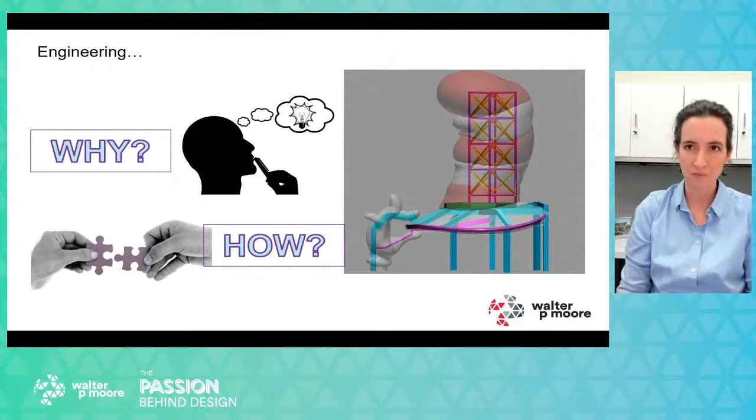So I've run the gamut of structural engineering for hospitals, office buildings, commercial, parks and recreation, and education, K through 12. But what I really have a passion for is collegiate sports work. I've worked on multiple different types of collegiate sports: basketball, football, outdoor track, indoor swim and dive. Every time I get to do something I haven't done before, it's very interesting.

The whole end goal is really to design a space that people are going to use and function in. So in order to do that, you have to understand what they want to do in the space. The architects sit down with all the end users, the coaches, and the facilities to really see what the space needs. Then they come up with the design, and we have to engineer around it and understand how it all fits together. It's very interesting and exciting to be able to work on these projects.

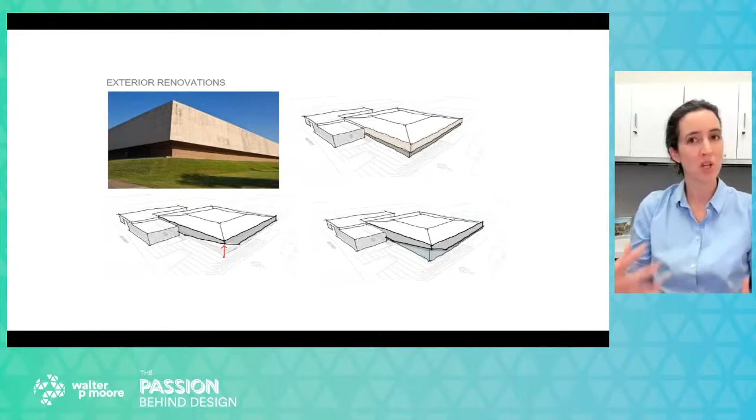So the first thing that we did in order to make the outside look like this: the original exterior was kind of bland. It was made during a time in architectural history where there really weren't that many windows, and these big solid panels were critical and important. And so it kind of ended up looking maybe like a big mushroom. And so I'm thinking in my head, how do you lift up a building? It's kind of heavy, but hey, I'm game. Let's engineer this. Let's figure it out.

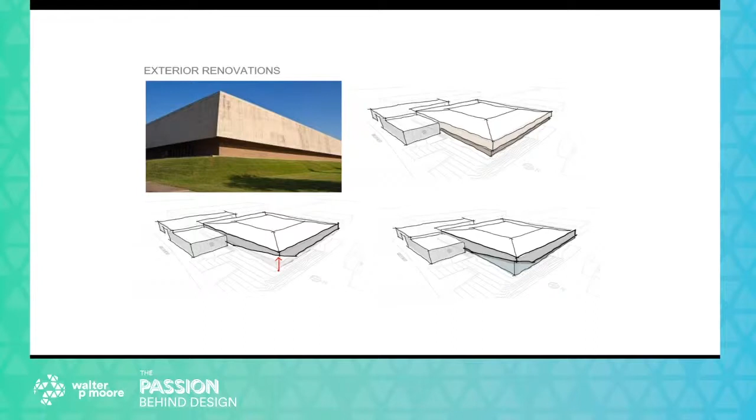So in reality, what these panels are, they're 17 feet deep trusses. So trusses are steel members that kind of work with a load path, a bunch of triangles. Very important part of engineering and structural engineering. But they're 60 feet long. And so luckily they're only supporting these exterior panels. They weren't supporting any part of the building.

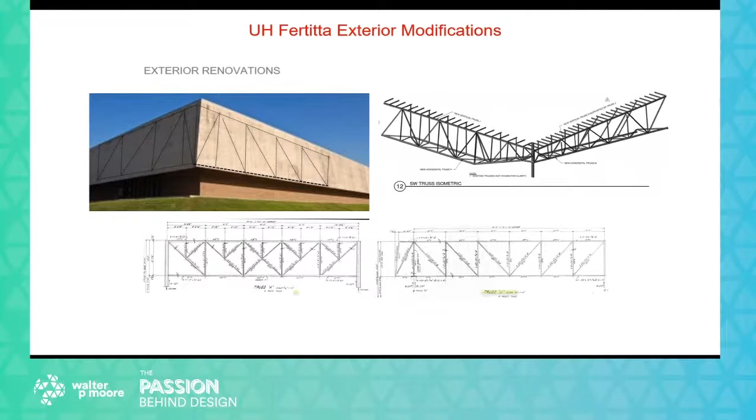So basically what we had to do is remove 2 of the panels and then create new trusses with the profile of the new exterior skin, and then replace the back with glazing to let light in. So this is how we kind of engineered the solution. So this structurally is how you lift up the building. So that was pretty exciting. And that wasn't all. This was just the tip of the iceberg.

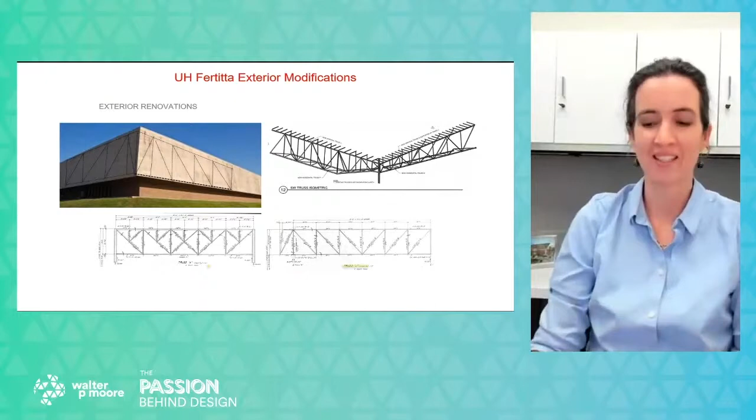So this is what it looked like. What we also did was a complete renovation of the interior. So this was a $60 million renovation, caused by a $20 million donation by Tilman Fertitta. And so Turner was the contractor on this project. They did an amazing job. The whole team, this was just a great project to work on. The U of H facilities guys were great to work with, etc. It was just really a transformation.

So the original Hofheinz Pavilion was a big oval seating area. In sports terminology, we call the seating area the bowl because it kind of dips down like a bowl. The really primo seats in basketball are going to be the ones right against mid-court, and in an oval those are actually furthest away. So we had to renovate that. We had to create new seating. We actually built it up with metal studs over the existing concrete seating to get it closer in, to get more seats in there. And then they really didn't have that much premium seating. So what we did is we created a new club underneath it.

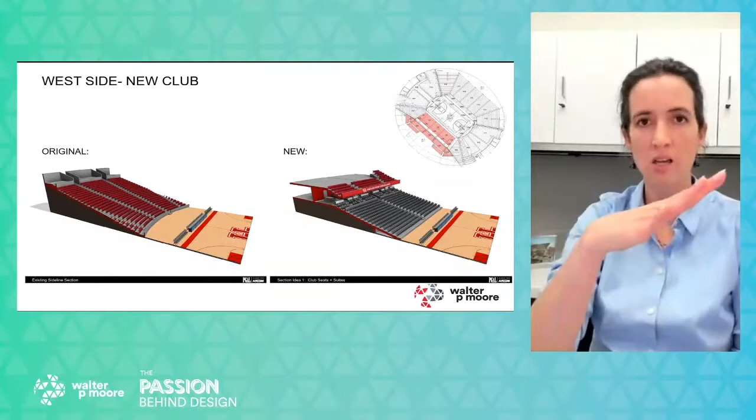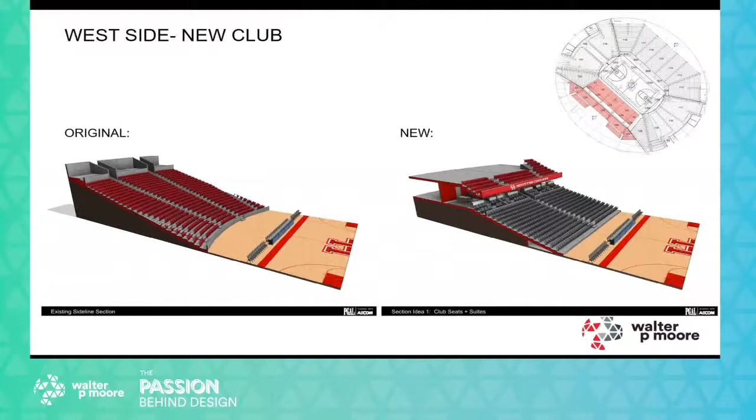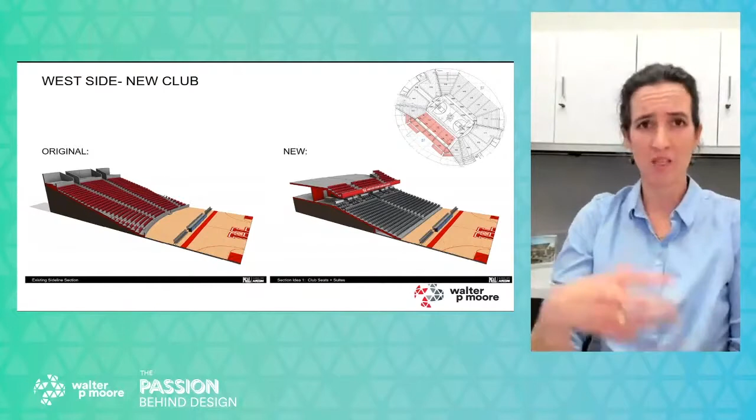So this was a rendering from the architect, AECOM and PGAL. This was the original seating on the left, where it was just a straight shot of typical seating, and then they have the premium in the background. And the new creation was actually building 2 tiers: seating and then a club area, and then an elevated space above that club area with a platform and new seating to get closer, but with an elevated view, because sometimes being right next to the court is not the best seat in the house. You can see the players, but you can't see how they interact on the court. So sometimes people enjoy being elevated. So now these became some of the best seats in the house.

So how we did that from a structural standpoint, like I said, they create the dream, we create the reality. The original seating was basically poured concrete, stepped concrete on grade, so on dirt. And so we dug out the dirt, we poured a new slab for the club area, we put a new foundation, a new steel column, a new steel structural system above there, and created those new seatings. And so out of the existing bowl, we created a new structural system within the existing building.

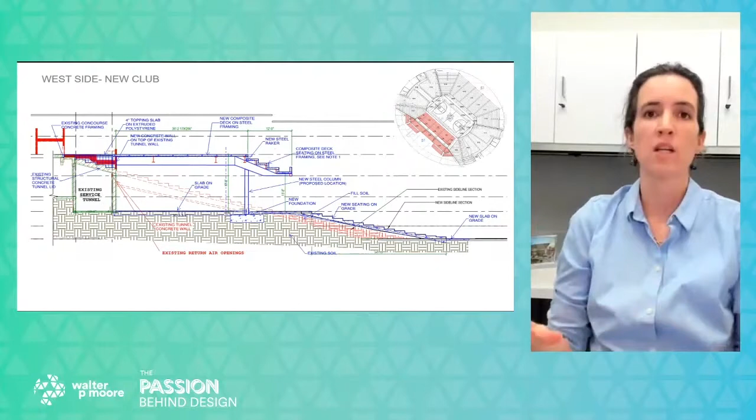So the roof was on, and everything had to be done in the tight spaces. And it really just transformed the whole arena. It looks completely different. It's the same building, the same skin, the same trusses, but it's almost like a brand new arena. So the other thing we had to do: sports lighting is important.

So make sure that you have enough lighting to light the players, with no shadows. Also, they hold events in here. They want to hold concerts and other major events, like PBR, professional bull riding. And so they want to be able to show and hang screens. So we created extra beams to hang from.

And then we created basically a catwalk walkway around up inside the roof trusses to be able to put all these lights and stuff in there. They have a really amazing light show now that's supported from these lights in the catwalk to really enhance this game day experience.

So the first question is, did you get to meet Tilman Fertitta? No, I did not meet him. I saw him. I got to be close to him, but I did not get to meet him. I did get to design the attachments for the statue of Roy Hofheinz, so there's a new Hofheinz statue there. I designed the attachment of the Fertitta name to the building, but unfortunately I did not actually get to meet the man.

The next question is, did you get to travel to see the project, and have you seen a game there? Well, I drove to the arena, which is about 9 minutes from our office. It was actually the night of our holiday party, a 1920s holiday party, so I was wearing my flapper dress. We left a little early and went to one of the opening night games. I was not the most well-dressed, but I was probably the only flapper in the audience. But it was amazing. You did get to see the excitement of the crowd.

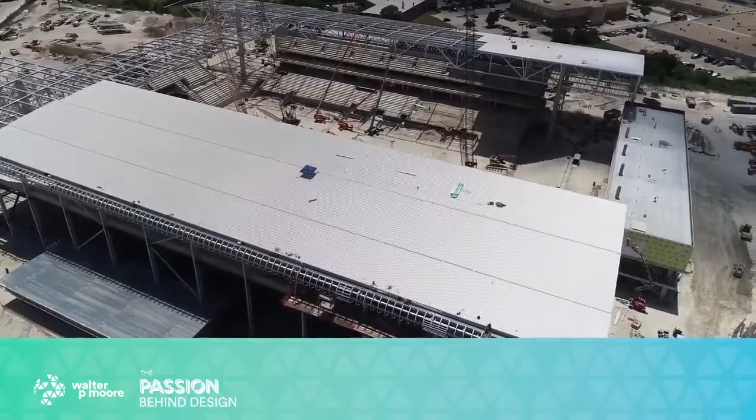And then one of my first projects was actually college basketball at the Yum Center in Louisville, Kentucky. And that was pretty exciting too. As big as we are in Texas for football, that's a college basketball town and region of the US. So I've done quite a few. My resume is fairly long.

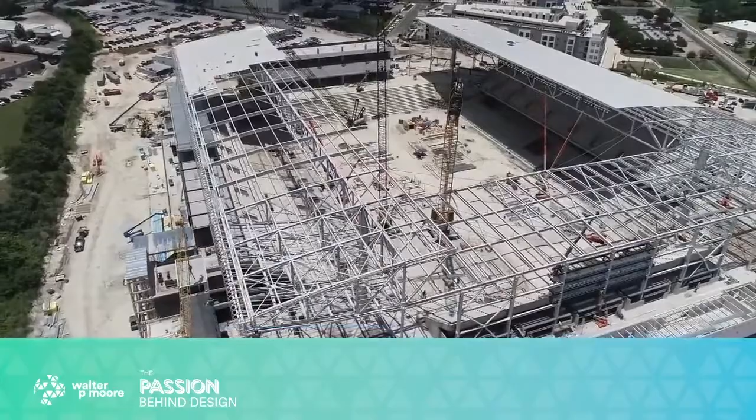The next question is, how does the floor accommodate a rodeo and basketball? It's a great question. I didn't mention rodeo, but rodeo is included. I designed an arena in Oklahoma before. And so rodeo is different. One, you have lighting, but you asked about the floor. The floor, like NRG Stadium for the Houston Texans.

So basically, the bottom is a concrete floor, and then you can put in the wood flooring with the balance for the basketball and the volleyball. Volleyball, I think NCAA just changed its standard, so there's a new actual flooring for volleyball. And when that happened, we got a call from one of the colleges saying they actually need more space to store the floors, so they can switch them out.

And so basically, when you have a rodeo, you pour a foot of dirt on the floor. And that's how you manage it. So when you're designing an arena for a rodeo, you have to deal with all the dirt issues. You have to make it durable so that they can power wash it a lot so that you can deal with the dirt.

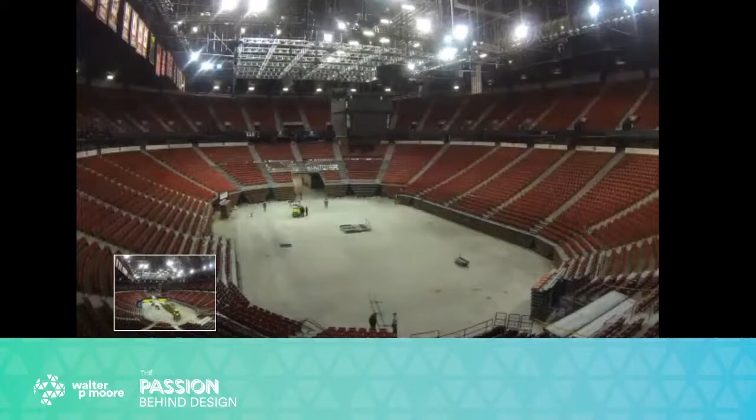Okay. Next question is, what's your favorite event to watch in the new arena? I like volleyball. I mean, I like basketball, but some of my coworkers played collegiate basketball, so basketball is really their thing. But like I said, growing up, one of my favorite sports was either watching women's soccer or volleyball. They don't play soccer in here, but volleyball would be my favorite sport to watch.

Okay. And then the last question for right now is, have you met any of the players at the stadiums you have designed? I get to be near them. So I design these things, but I am still on the outside. They're still the superstars, and there's the background team. So I'm working the background. So I see them, but I've never actually gone up and met them. More likely to meet the coaches and such. And the architects usually end up with more of the interaction with those.

But I got called out when I'm looking at a ballpark and the pro athletes are playing down there. And so I'm like, all right, which athlete has the blonde wife and the dog or something? You don't interact because they're doing their job, and their job is not to interact with me. I'm not a fan. I'm a worker. So I don't get to meet anybody, but I get to see them practice.

I've been in the U of H basketball practice. When they're practicing, I'm walking around, scanning, looking at the existing conditions, and I can hear them in the background. So it's kind of like a behind the scenes tour, but you still have to remain behind the scenes.

Okay. So that's all the questions we have for right now. So I think you can continue on to the next case study. All right, sounds good. Okay, let me go back over here.

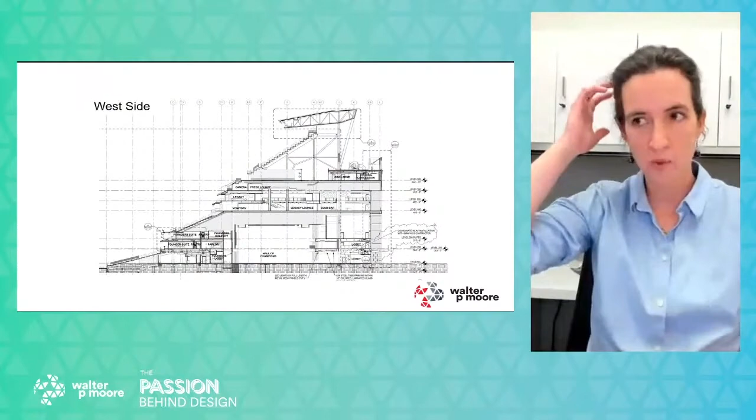The architect was Populous, the GC was a joint venture between Manhattan and Vaughan, and ME was the MEP engineer. So these are the sections of the building, from Populous's architectural drawings. If you cut the new alumni side down, this is what it would look like. You can see the tucked-in premium levels. There's the seating that we have to tuck in.

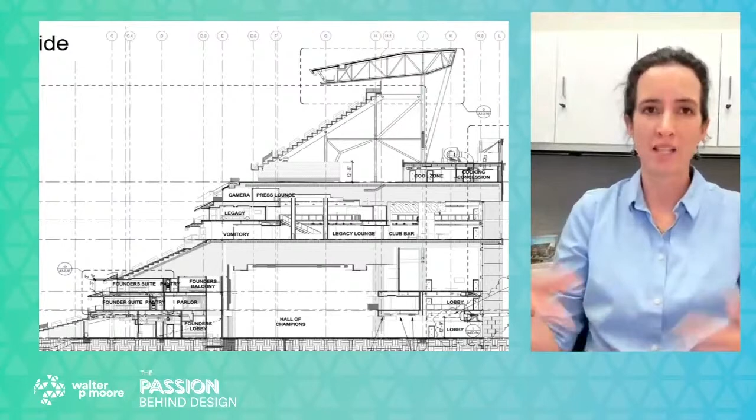There's a new canopy on the west side and the east side that was primarily to help shade the fans, but also to redirect their sound back down to the field to create that atmosphere of loud intensity when the opposing team was playing. And with all these premium seats, which is really where a lot of the money is made, everyone can just watch the game on their TV at the house. So you really have to create new ways and new experiences to get them into the seats. So this is what the architecture will look like.

There's a big open space called the Hall of Champions, a big event space that they rent out and show all of the historic sports figures from Texas A&M. We had to span over that, but we still had 5 levels of structure above it. So we had 15-foot-deep trusses going over 100 feet to support all that. So this is what I designed. The architect comes up with the levels, and then we design the structure. This is what we come up with.

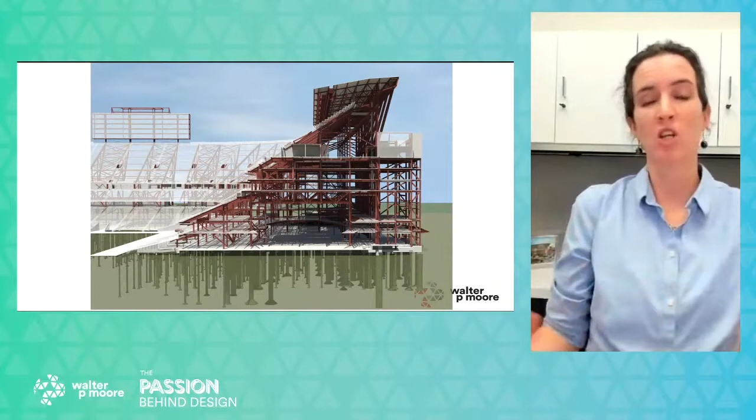So many aspects of this project I can talk about. I can talk about this project for days, but I'm going to talk just a little bit about the scoreboard. So the scoreboard is like 163 feet. It basically doubled the size. There may or may not be a lot of ego in collegiate sports, and A&M's primary rivals had a large scoreboard, and so this one had to be bigger. So there's a size requirement for how big this thing needed to be.

Scoreboards are made up of individual LED panels, and you can replace them. I don't know if you've ever seen one that went out, but you just get a black spot where it goes out. And so you actually have to design a series of walkways behind it every 10 feet so that you can interact and take the panels out if they're not working.

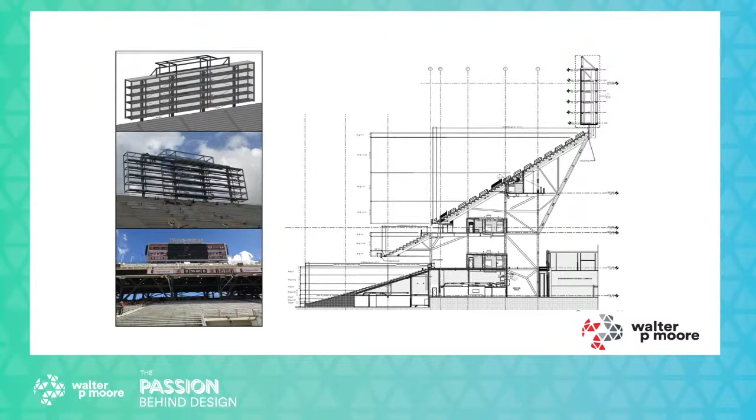So this is what the inside of the scoreboard looks like. There's 5 levels of catwalk, and then there's the roof, and then you have to create the structure to actually put the lettering on top of it. Now this scoreboard is 160 feet long and 40 to 50 feet deep. This is a 3D rendering from Revit of all the steel structure that we designed for it.

You can see the seating there. You see the openings in the seating. Those are called vomitories, where you can go back to the concourses and go to the restroom or get your concessions. And so this is a close-up of the scoreboard in reality.

It's very high up there. It definitely got my steps in. I actually had my daughter, my oldest, during this project, and so I will say walking up 9 months pregnant to get to the top of this, it's a workout.

And then this is the final product. So this is what it looks like. And this is everyone seeing the immensity of it. You can see there's the speakers on either side. Because this was built in phases, between phase 1 and phase 2 the whole sound system wasn't installed yet, so they had to hang temporary speakers. And so we had 2 telescoping tubes that stuck out to support the speakers.

I wasn't the engineer of record for the whole stadium, but I was actually the engineer of record for those little tubes that you see sticking out supporting the thing. So that was my design. That was me, all me. And then after phase 2 was built, they telescope in, and then this is a video of the fans enjoying it. You can see the excitement.

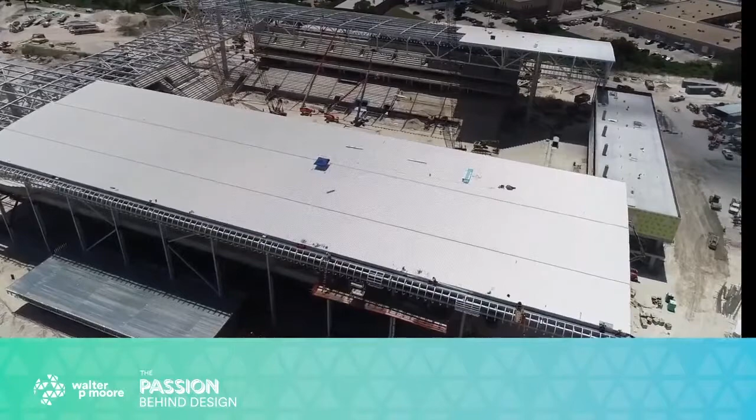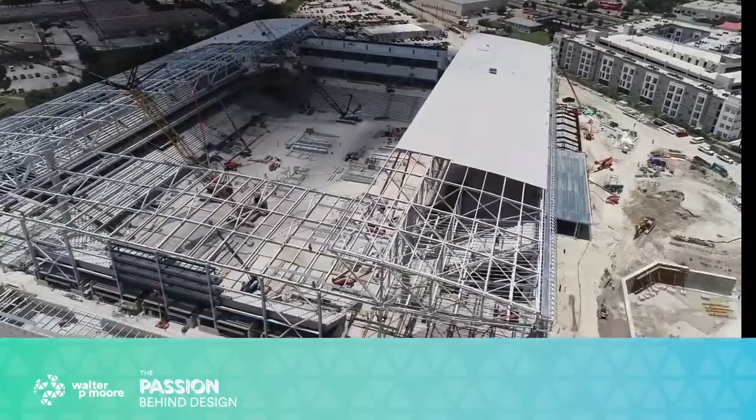So depending on how many crews, this was multi-crew, they made it in 9-month schedules. And they did some of the exterior work during the actual football season. That's super, super crazy fast. But in the normal range, if you're working a standard 8 to 10 hour day, 6 days a week, it can take anywhere between 2 to 4 years.

Okay. Do you prefer indoor or outdoor stadiums?

I like indoor. I like arenas, long span arenas. And there's also the hybrid. So Walter P. Moore actually specializes in the retractable roof, which can be both. So I like the long span roof and the catwalk systems. And that was actually one of the things I was designing this week on another project. It was just some of the catwalks and the multi-level and kind of talking about how they all perform. So I like indoor for the most part.

Okay. This is a good question. Does the cost vary when making stadiums? Yes, absolutely. There are chandeliers in Kyle Field, literally. So it really depends on your finishes. So there's the bare bones. So the Houston Dynamo, that's the soccer stadium. That's kind of like the golden standard for the low cost economic stadium. So what you have is painted block as the exterior, walkways, concourses. It's very basic. You find one feature to put your money in. And in the case of the Houston Dynamo Stadium, it's going to be the exterior skin. But the interior finishes are pretty bare bones.

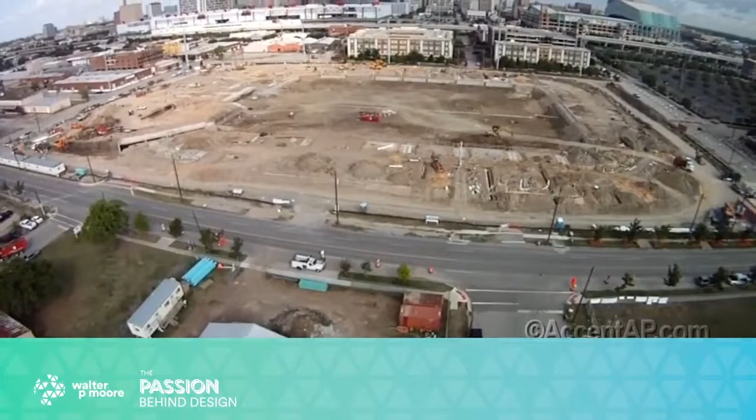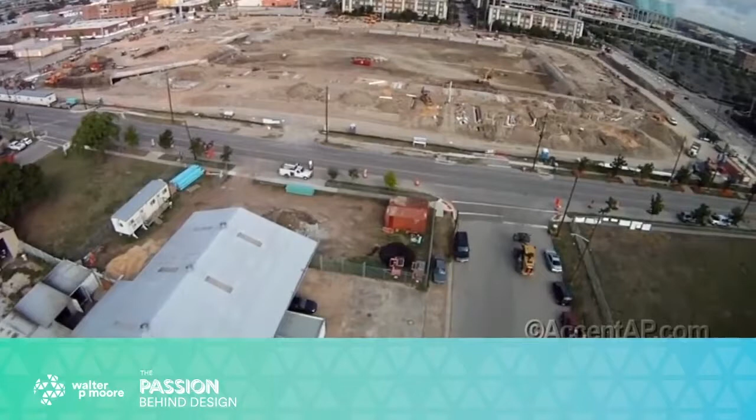Next question is, other than structural engineers, who else do you work with on stadium projects? Yeah, so we have the sports architects. Sports architects are specialty architects. They're usually firms that just work a lot on sports architecture, so they've done these things multiple times. There's a huge group of them in Kansas City. There's a group of them in Dallas and LA. So I work with sports architects, and I really enjoy that they're so knowledgeable about what they do. I really enjoy working on a really well-functioning, very competent team.

But then there's also specialty people, the mechanical engineers that design all the HVAC, so air conditioning and heating. Imagine heating all of this open space; it takes a specialty type of design. And there's the plumbers, and then the electrical engineers, who have to specialize because of all the sports lighting and the specialty electricity needs for these types of arenas. You end up working a lot with the same team over and over again, which is nice. They kind of become your friends.

All right, next question. How much does that scoreboard weigh? I want to say it's only about 10 to 15 pounds per square foot. It's pretty light from a weight perspective. The biggest issue is the wind that hits it. It's like a big wind sail. So if you design,

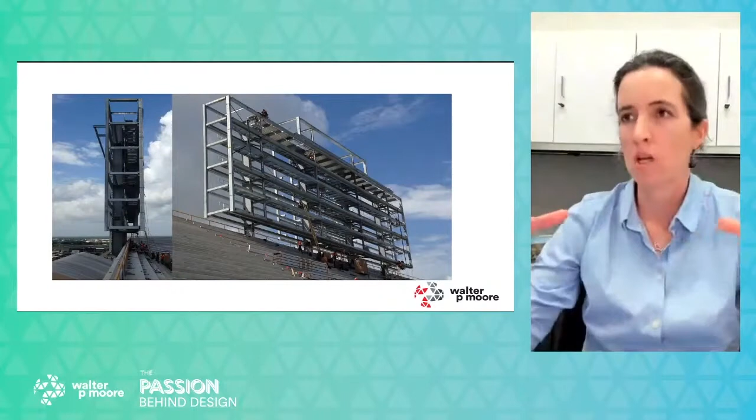So it's the wind. For these types of structures, if you design the wind just by code, it's usually at a much higher wind pressure because codes are typically designed for buildings. So what we'll do in this particular case is hire a wind tunnel consultant. And we actually ended up with the Kyle Field wind tunnel model. Basically they build a small model; the whole thing was about 2.5 feet by 2.5 feet. It was actually done in Europe. We had it shipped over, but it was basically a full model of the stadium, including the scoreboard.

And then they check the wind patterns of the area and spin it around. Basically, they put it in a wind tunnel and blow wind on it to see what the different pressures are on the areas in question. So we actually had a wind tunnel study. I think it reduced the amount of wind that we had to design for by like 30%. So while it wasn't that heavy, it was the wind that was part of it. The aerodynamics of that was pretty interesting. There were specialty engineers explaining how that wind went, and we had the wind tunnel done for the canopies on the two sides as well. That was pretty interesting.

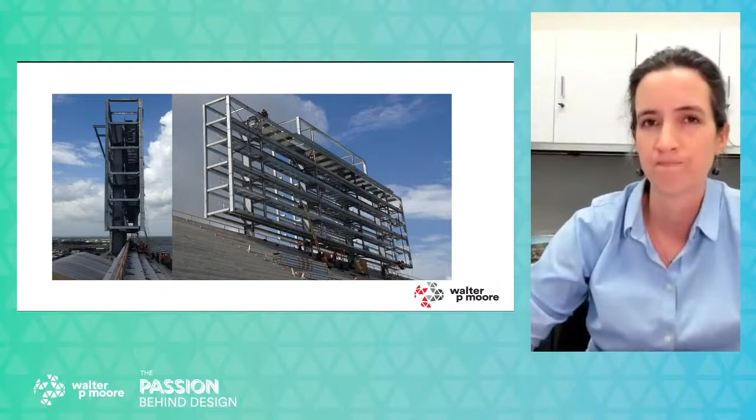All right. Did you always know you wanted to be an engineer? Nope. All I knew was I did not want to be a teacher. So my mom taught high school, as did my stepfather. And so I've been grading papers since I was like 12. So I crossed that one off.

I'm not the most patient of people. And then when people get sick, they get crabby. I don't really deal with them. So I knew that wasn't necessarily something that I was going to enjoy too much. So I like solving problems. I've kind of always liked playing with Legos and stuff.

So I never knew I wanted to be an engineer per se. My parents were teachers or in the oil industry. I didn't really know that many engineers. So I didn't really understand exactly what engineers did, but I knew I really liked doing stuff and making stuff and creating things, and it kind of just stuck. But no, I went into college as a general studies major. So I figured it out quick, and I'm glad I did.

And internships really help you kind of finalize that. But that's one of the things the ACE Mentor program's helpful with, is kind of helping you understand what these things are before you get into college, so you can have a better idea.

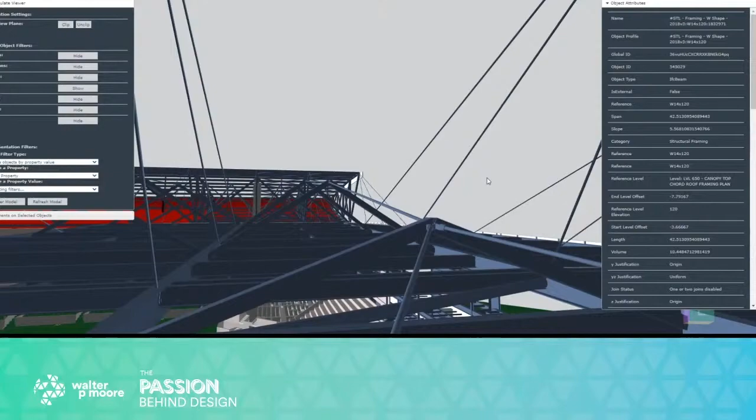Okay. Do scoreboards have any features such as Wi-Fi and Bluetooth? So the Wi-Fi and Bluetooth isn't. They're usually hard cabled, but Wi-Fi is usually installed around the stadium. So there's these little panel boxes they put underneath the seats. And then sometimes I know that they attached.

Okay. Next question. Do you have any advice for those interested in pursuing engineering? Yeah, absolutely. Go for it. But you gotta be curious. So like that first question, and I don't want to scroll through my whole presentation, but the why, if you find yourself asking why they did that.

And so I can even, getting a new toy or a new piece of something, like a camera, and trying to figure out where would I put the button? You know, making logical sense. And so I can usually go, hey, oh yeah, there it is. That's where I would have put it too. And sometimes it's totally not there because either I have no idea what I'm doing with the piece of equipment or it wasn't designed correctly.